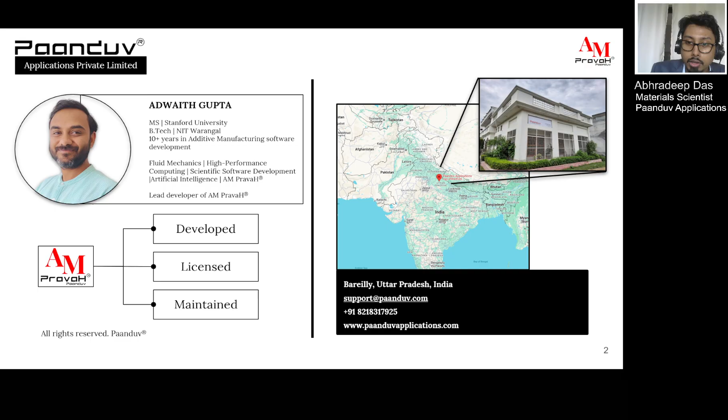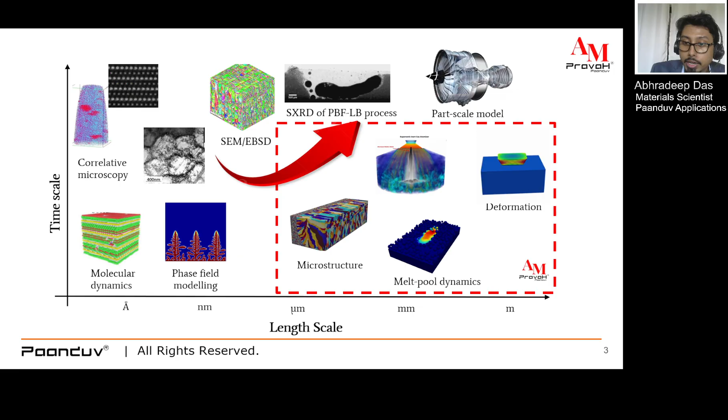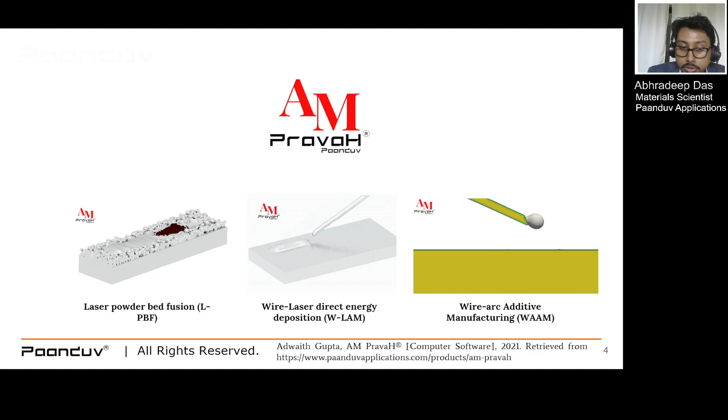With AM PravaH, we tend to work on three fundamental additive manufacturing processes, which is laser powder bed fusion and wire based direct energy deposition techniques, which includes wire laser DED and wire arc DED processes.

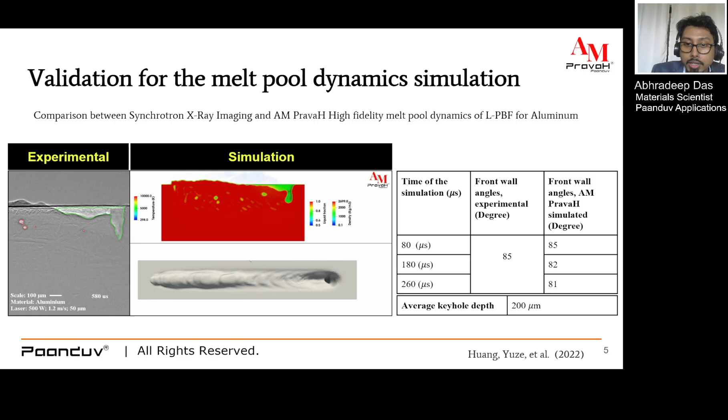Starting with some of the validations of the particular software, what we have observed and what we have reached so far is that we have validated the synchrotron X-ray images and tend to understand the subtle physics of this particular problem. With our simulation tools, without even performing experimental tools, we can have an idea about how this particular process governed by complex phenomena is actually operating.

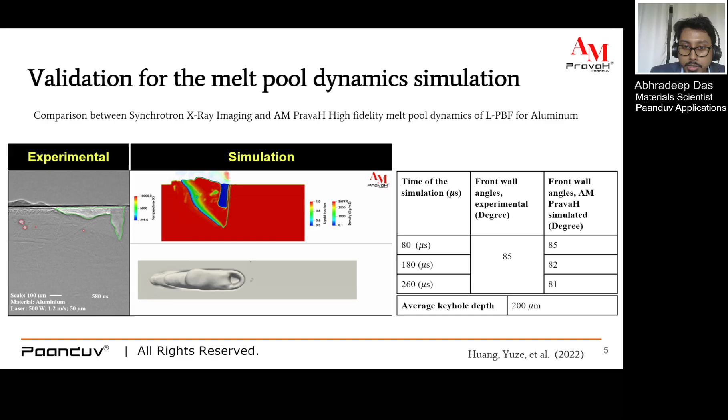You can clearly see from these results how accurately the particular phenomena is captured, considering the different manifolds of this particular process, which includes the defect formations and different melt pool profiles. That's what we are doing for the melt pool dynamic simulations.

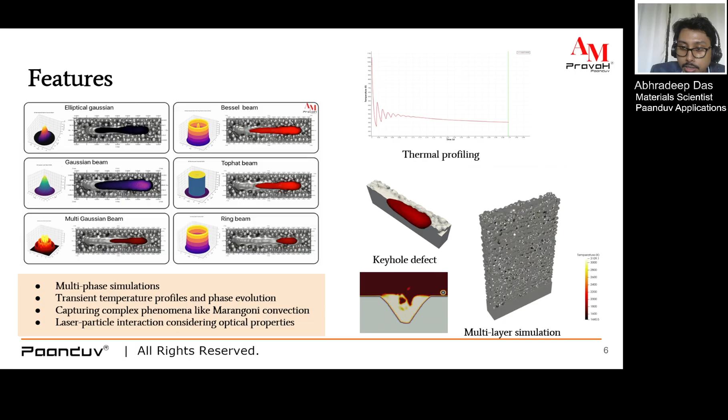With that in aid, I would like to demonstrate certain defects that we have captured quite successfully, involving the deep physics within the formation of these sorts of defects in these innovative processes. We are not restricted to a single layer process - we have extended ourselves to multi-layer processes as well, capturing all the subtleties of the processes itself.

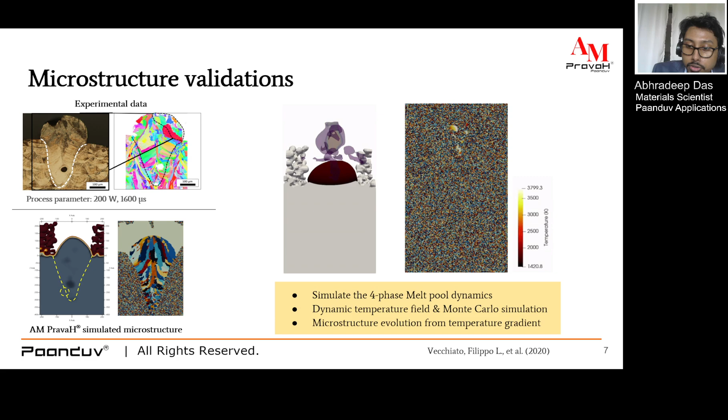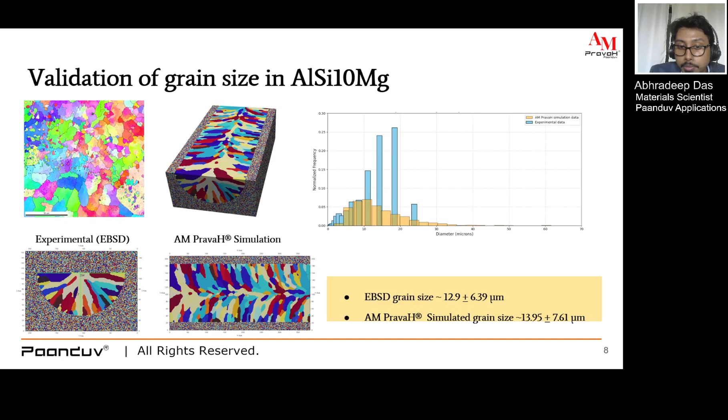Here is another validation where you can see that we have accurately captured the deviations of the grain sizes as well, wherein we have validated our results against experimental EBSD analysis, and we can also see that we are extended to Wire-DED based processes, which includes WLAM and WAAM.

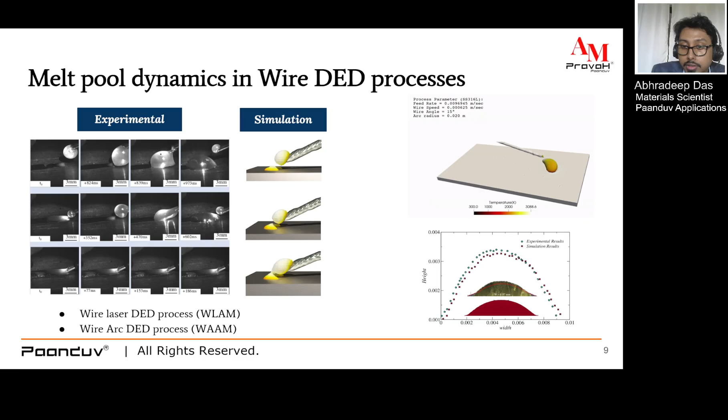With our validation studies, we assure you that the simulations that we are providing are quite accurate and are in close agreement with the experimental results.

So, in a nutshell, I present AM PravaH as an end-to-end simulation software that includes starting from the powder preparation, including processes like powder atomization, to a part scale simulation wherein we are completely building the entire part and simulating it. We have observed that using this physics-assisted software, you can cut down the cost by around 67% in the range of process optimization and material innovation.

It has been an integral part in the part qualification for specific custom products such as aerospace and biomedical as well. Also, with the aid of such software, we reduce the

reliance on experimental trials and the necessary characterizations for the materials, and that's how it saves time and it saves exhaustive resources, and that's how we position ourselves as a solution for that as well.

We have emerged as a virtual twin for the entire AM workflow, not just for the powder based processes. We are here for the Wire-DED based processes as well. That's what we can see here, that the additive manufacturing process chain is entirely covered with our software.

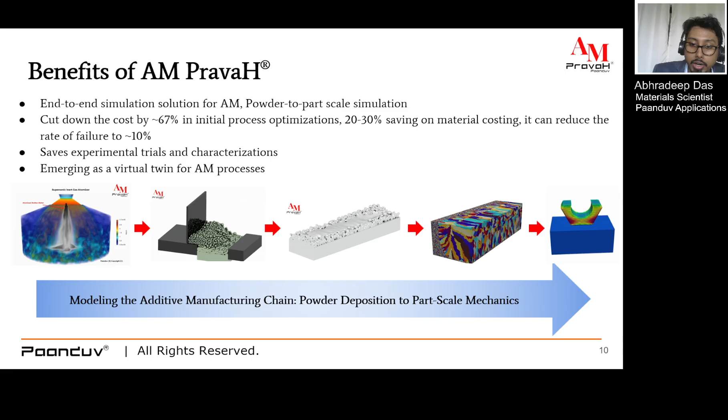So this is a GUI interface of AM PravaH, which is pretty simple, and also we take up values for the temperature dependent thermophysical properties, and it comes with an in-built material database that we are providing in

the software as a drop down, and it has customizable shielding gas, that is, you can vary different sorts of inert gases, and that's how you control what should be the optimum parameters required for the shielding gas to be operable.

We have also customizable powder distribution depending upon your needs. You can change that. We have different scan patterns that can be imported here in the software.

We have the ability to vary different process parameters with the software, and also we have the capability of changing the different simulation performance parameters that govern the entire workset.

We also augment the software with the capability of AI that requires building of data sets. That is an excellent tool for the material innovation aspect.

We have a Queue module that reduces human intervention into the process and reduces the human reliance over the entire workflow that you may have designed.

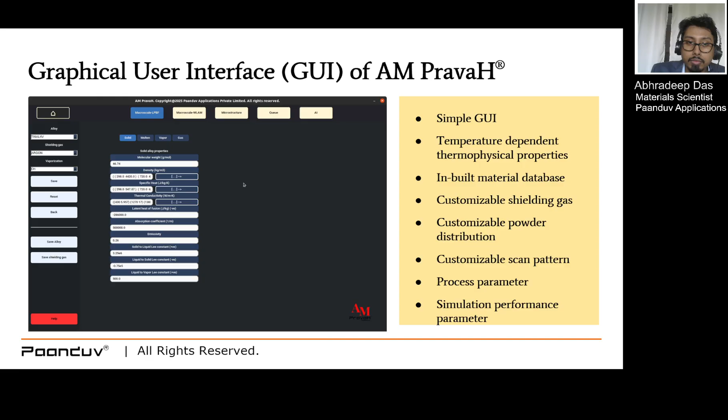So that's all from my end, and I would like to present the company as an entire solution for the entire additive manufacturing workflow system.